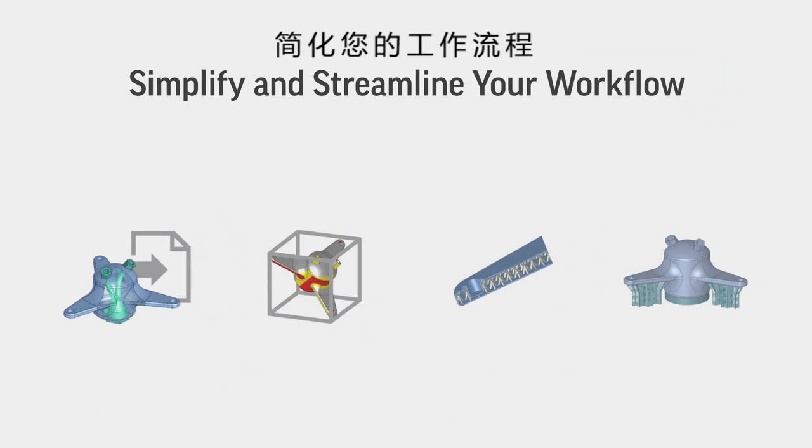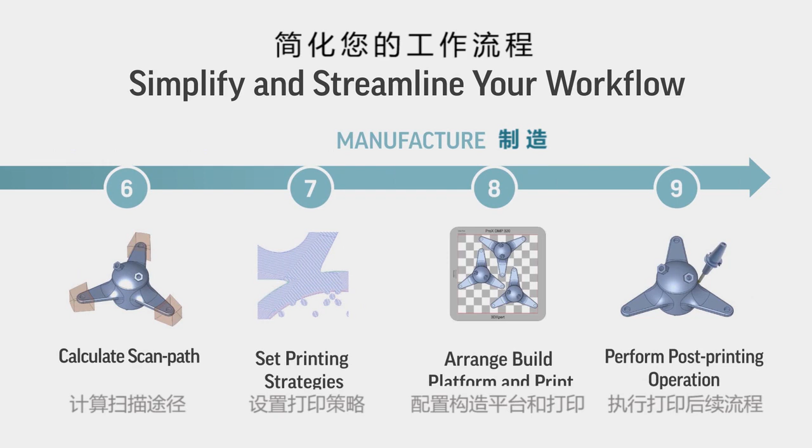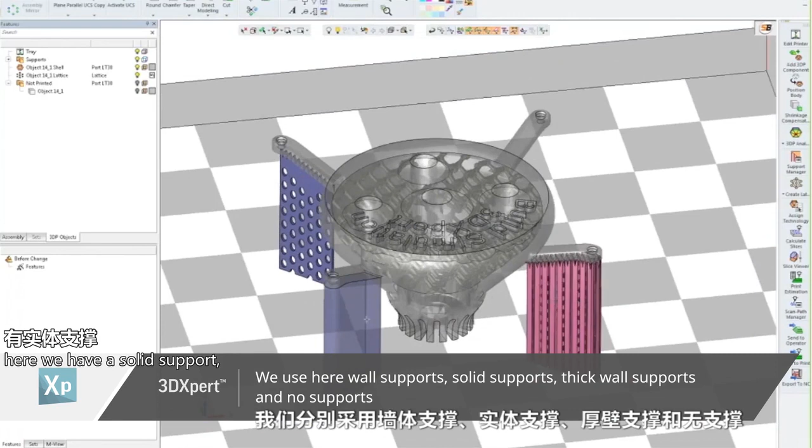This is a part we prepared for this, and we wanted to test what different kinds of supports will look like when we do our build simulation. So there's also lattice inside, as you can see, and then here we have wall supports, here we have a solid support, here we have a thick wall support, and here we have no supports.

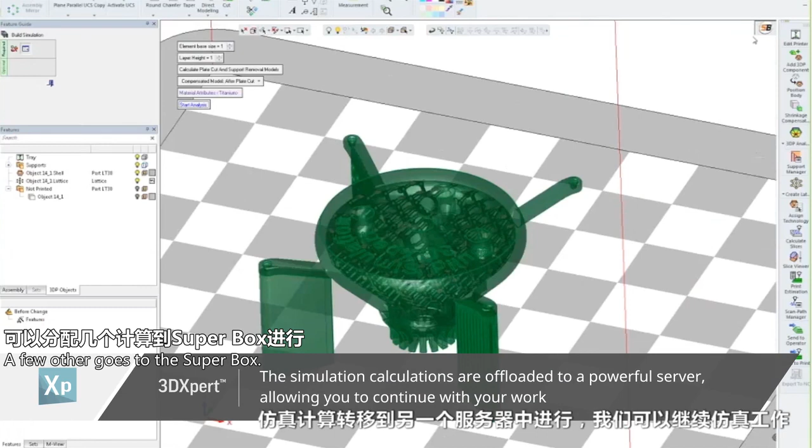And so I take this to my build simulation. I can specify what kind of accuracy I want to use. This, of course, has a huge effect on the time it will take to calculate this. Material and a few other things, and it goes to the server. So this is the server I talked about.

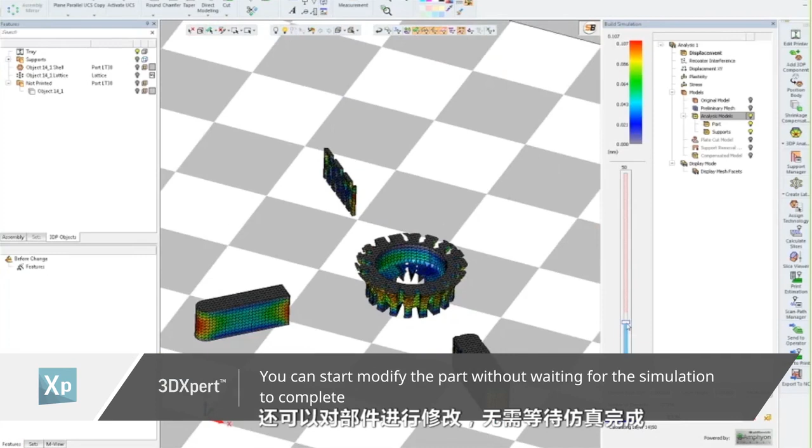So you can see the slider here showing me how far the calculation is done, and I can go up every time it calculates another slice. I can go and see it. So I can already start and analyze my model, because it is the distance of each point from where it was supposed to be to where it is after the printing. And I can show you something really nice with this.

If we look at this support, at the thick wall support, let's make it a little nicer. One second. Okay. So if I take it down, it started out like this, and now I'm starting to move up the slices, and you can see it stays more or less in place. But then as it reaches the part, you can see it starts to bend towards the part. So you can actually see the deformation of material as the printing goes.

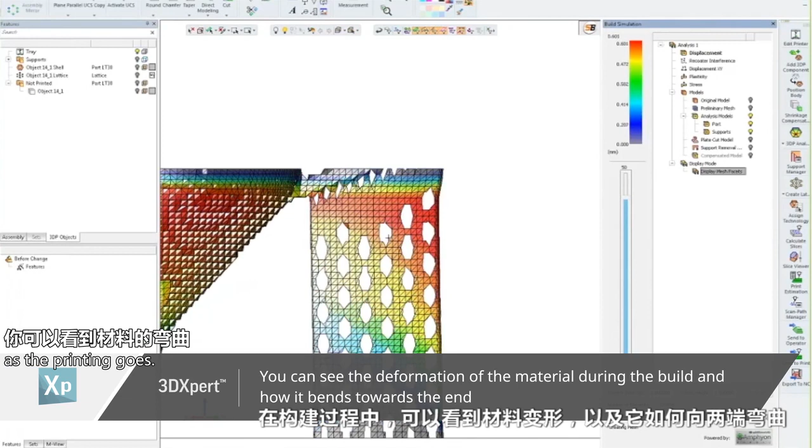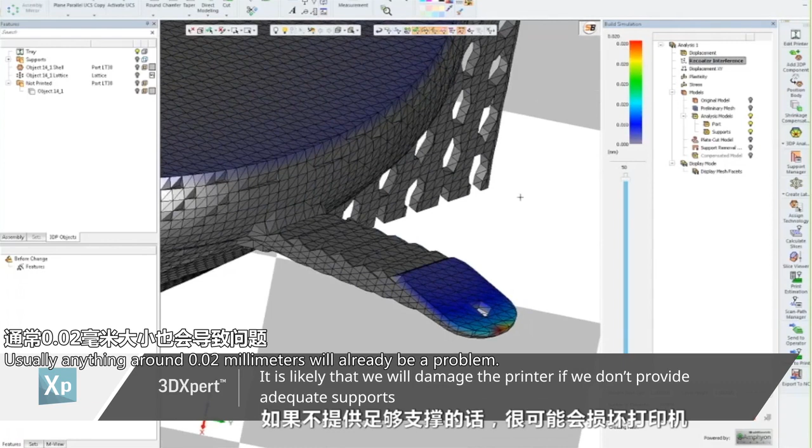So as I said, when we have areas that are not supported well, we would expect to see recoater interference, the material going up. And if we go to this layer, for example, we can see it very clearly here. So usually anything around 0.02 millimeters will already be a problem. So we have that here, and it's likely that we will damage our equipment if we don't support this end of the part.

You can see this doesn't happen anywhere where we have supports. So that's a good example. Here, in this layer, it's even worse because of the material.

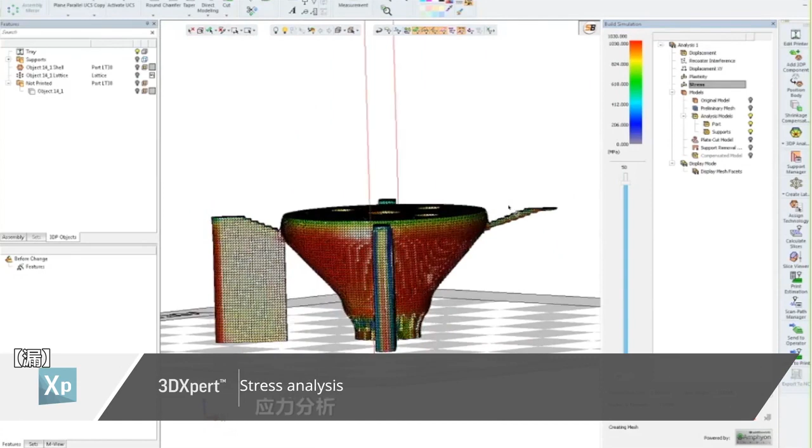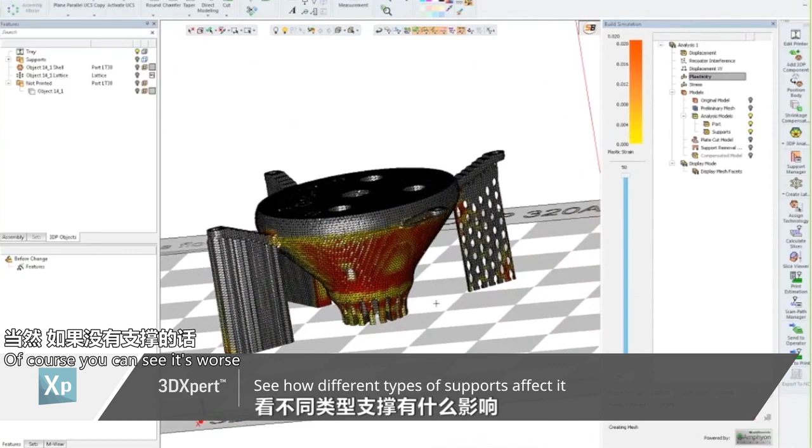So this is the stress analysis. Again, we can see it in different layers, exactly what happens and how the stress changes as the part is being built up. And more importantly, a little bit above that, but this part definitely has problems because it goes quite high. And of course, you can see it's worse where we have no supports.

And you can also see it's very severe here with this very thin support. And actually, this is very likely to be torn at this point. So, of course, we would need to add more supports.

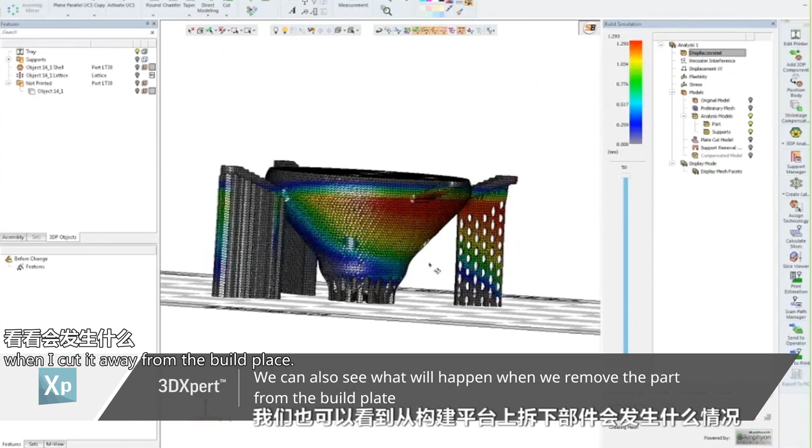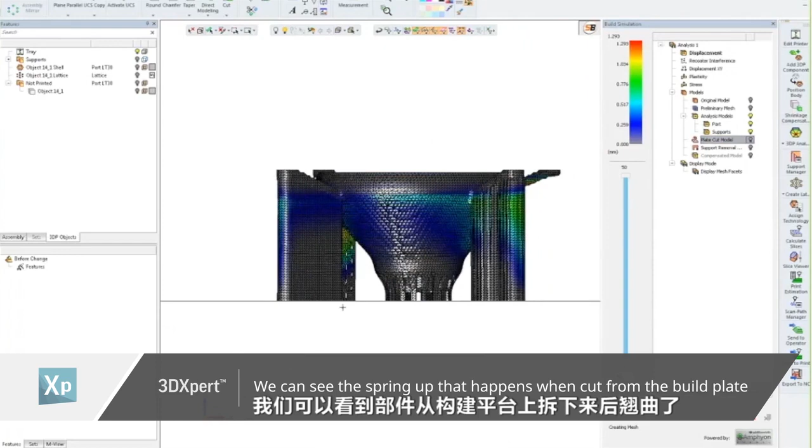I also asked to see what happens when I cut it away from the build plate. So this is nice to see when we look at it from here. And then I switch to the plate cut model. So you can see that as soon as this is cut away from the plate, these supports rise up, and this is how they were before. Let's switch to one of these views. Okay, that will be easiest to see. So this is after cutting it away from the plate, and this is before. You can really see them spring up.

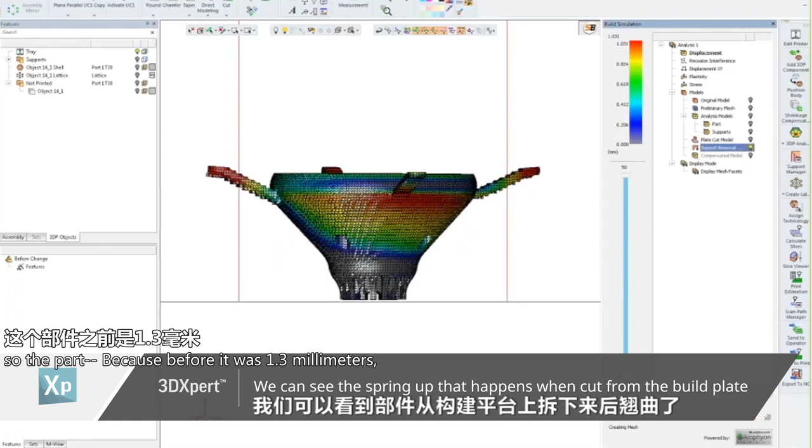And then we can see the support removal. So what will happen to the part after we remove the support? Actually, the displacement levels are a bit smaller, because before it was 1.3 millimeters, now it's about 1 millimeter. So there was some spring back on the part, a little bit in the opposite direction of the displacement. So in the end, when I print the part, I get the real desired geometry.

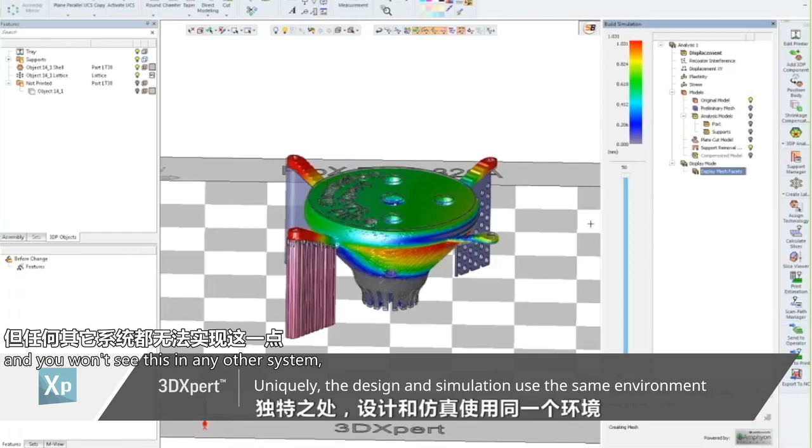So I can see here, and you won't see this in any other system, I can see here the original model I'm working on in the same environment, and this is the same environment where I can make changes to my design and change my support and change my orientation. It's the same environment as where I do my build simulation.

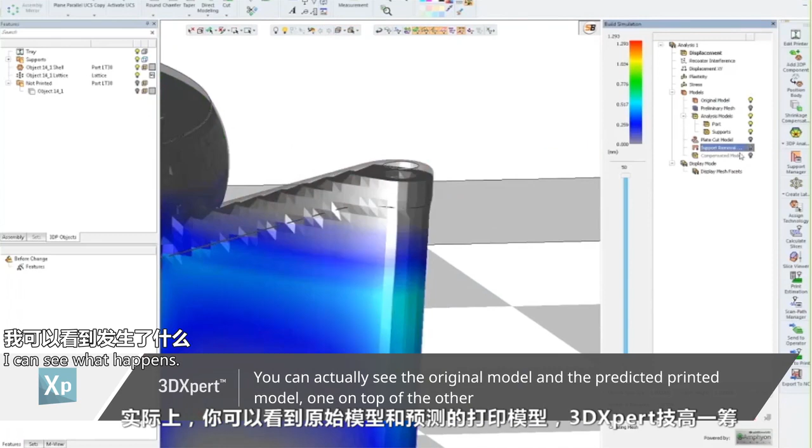I can actually see these one on top of the other, so I can see what happens. This is the original model, and this is where the part is right after it is printed, and I see them one on top of the other.